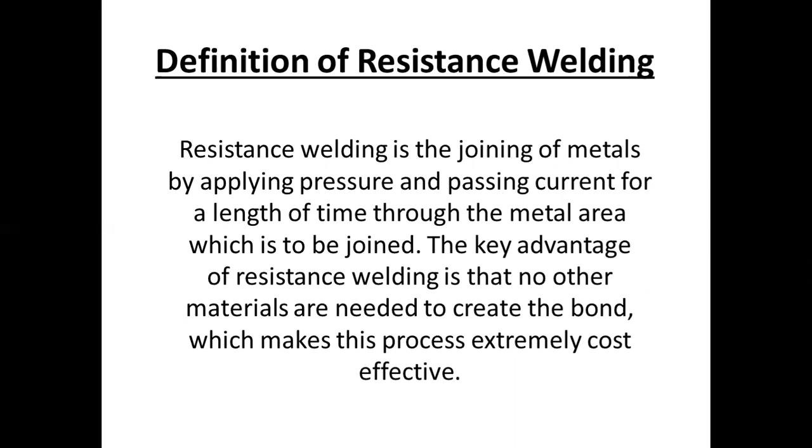We are doing this kind of welding through the metal area, passing current for a length of time through the metal area which is to be joined.

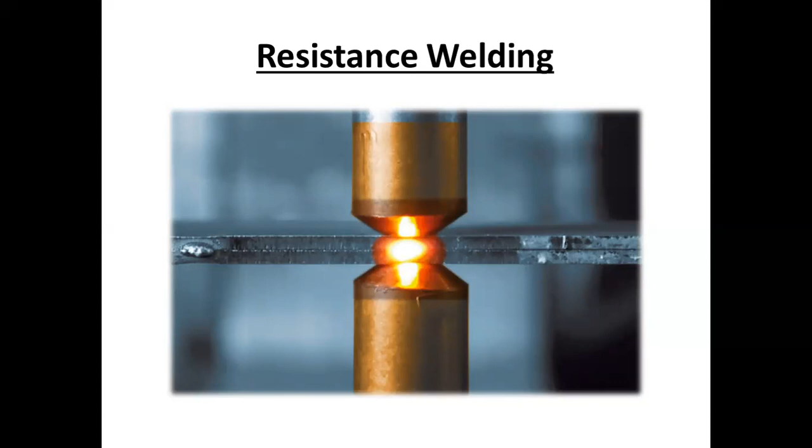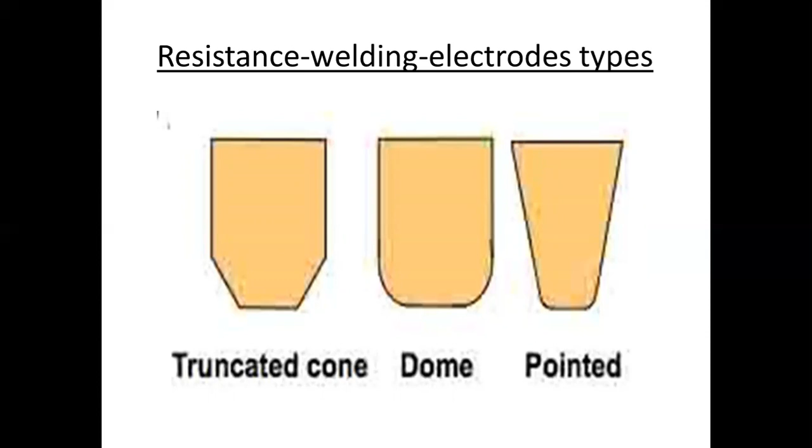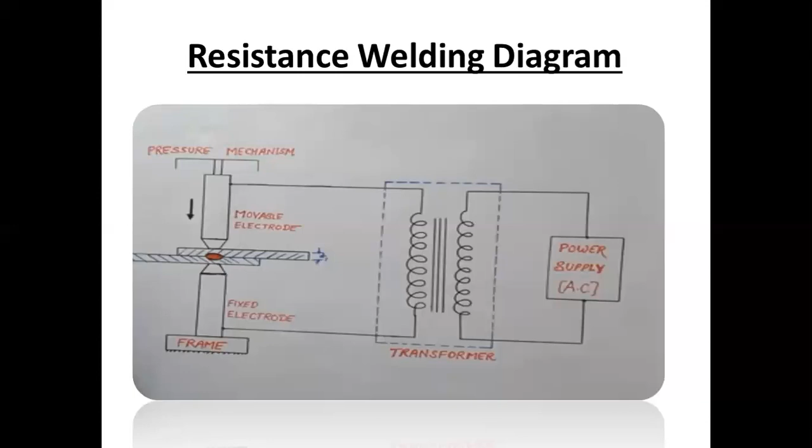There is 10,000 ampere current and 4 to 12 voltage. We are using this for the resistance welding.

Resistance welding working principle: the working principle of resistance welding is the generation of heat because of electric resistance. Resistance welding, such as seam, spot, and projection welding, works on the same principle. These are the types of resistance welding. We will discuss afterwards what is spot welding, what is seam welding. So whenever the current flows through electric resistance, heat will be generated.

Whenever the current flows through electric resistance, the heat will be generated, and the generated heat will depend on the material's resistance, applied current conditions on a surface, and the applied current time of period. This is how resistance welding works.

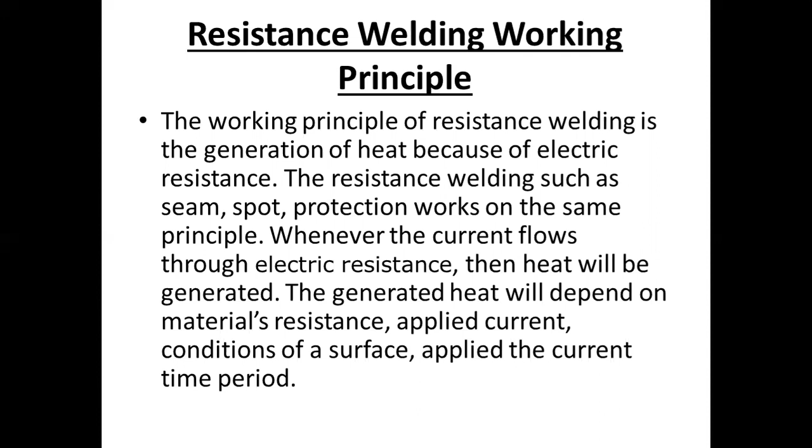Resistance welding formula for heat generation is H equals I squared R T. With this formula, the heat will generate, where H is the generated heat, and the unit of heat is joule. I is the electric current, unit is ampere. R is the electric resistance, unit is ohm, and T is the time of current flow, in seconds.

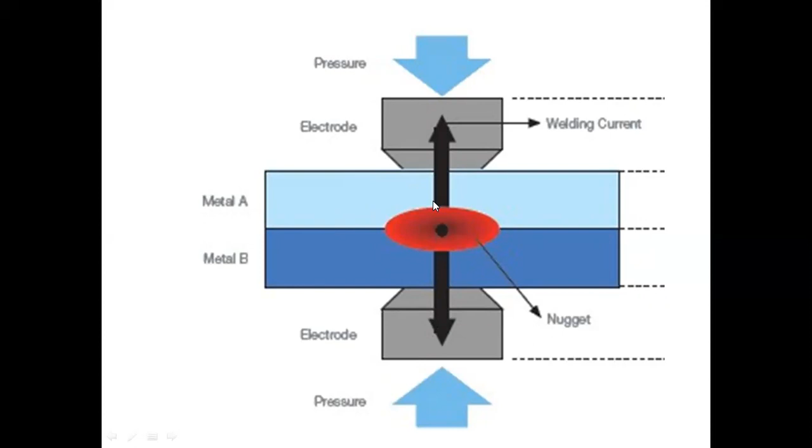As I said earlier, the pressure will be downwards, the electrode, the electric current is on metal A and metal B. Where the welding is done, this type of spot is called a nugget. So what is a nugget? In resistance welding, the welding of overlapping pieces of metal at small points by application of pressure and electric current creates a pool of molten metal that quickly cools and solidifies into a round joint known as a nugget. So you can see the spot, this is called a nugget. Understood?

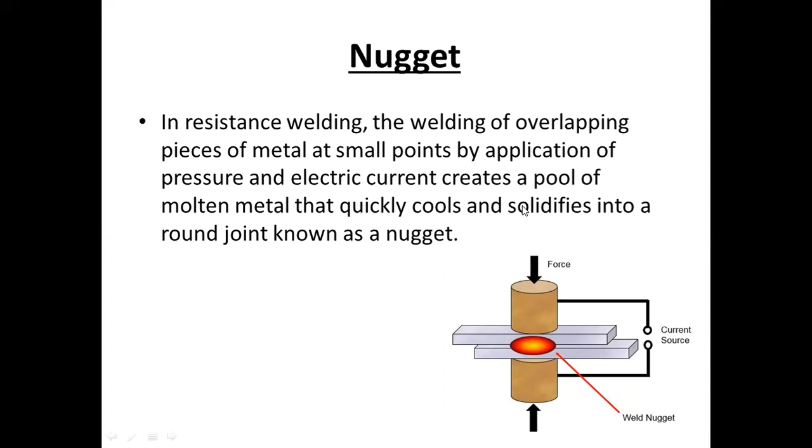Now, the types of resistance welding: spot welding, seam welding, butt welding, and projection welding.

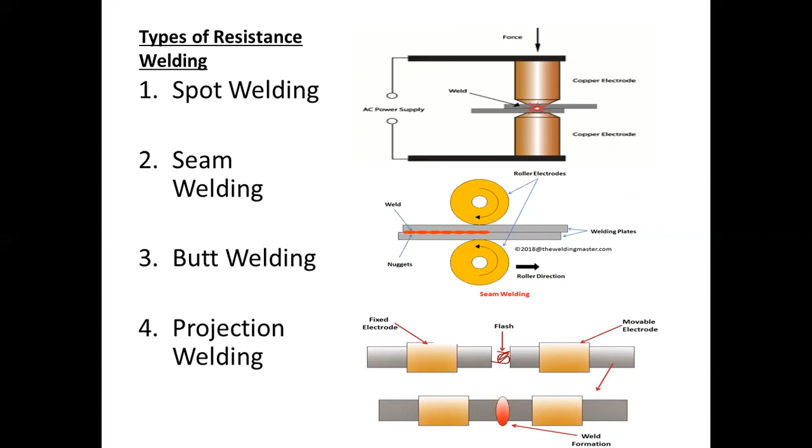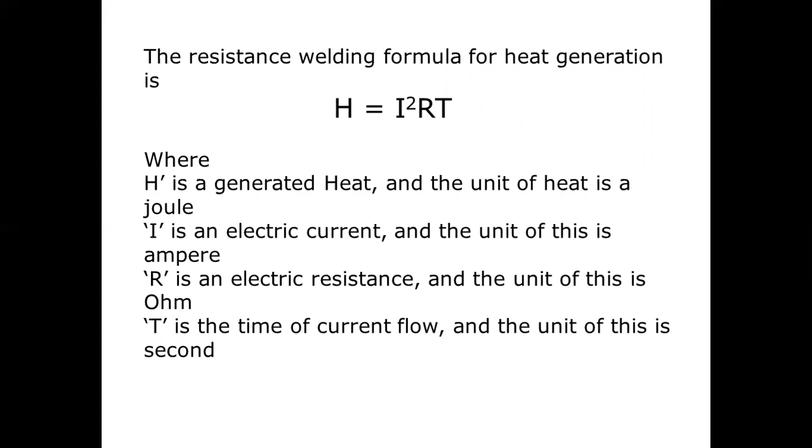Spot welding, or resistance spot welding, is a type of electric resistance welding used to weld various sheet metal products through a process in which contacting metal surface points are joined by heat. It is the main fundamental thing in resistance welding, and in spot welding also, metal surface points are joined by the heat. And how can I generate the heat? We can generate heat with this formula, H equals I squared R T, where we put the current, resistance, and time, so we can generate the heat.

So the metal surface points are joined by the heat. The AC power supply, force, downwards pressure, copper electrode, and we are using in the electrode copper with alloy. What kind of alloy? Tungsten, nickel, chromium. It will increase the hardness of the electrode.

Another type of welding is seam welding. Seam welding is the process of joining two similar or dissimilar materials at the seam by the use of electric current and pressure. As I said earlier, the fundamental principle of resistance welding is using electric current, pressure, and resistance to develop heat and form the nugget, completing the welding process. This process is mostly used on metals since they conduct electricity easily and can sustain relatively high pressures.

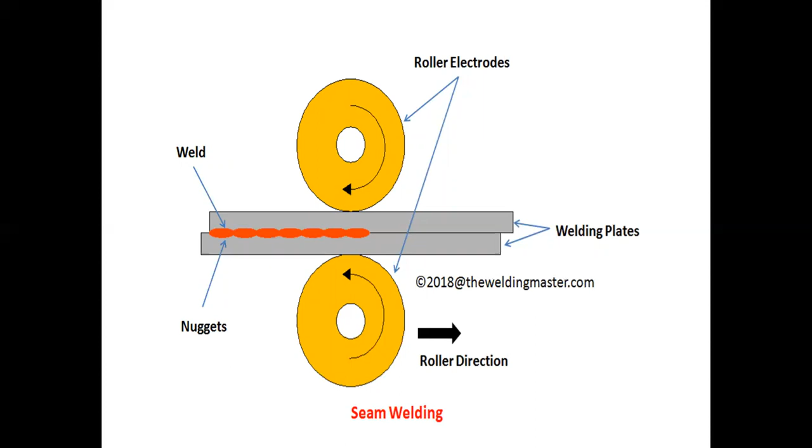This is another type of welding, butt welding. In butt welding, two pieces of metal of the same cross section are gripped together and pressed while heat is generated. There is a movable electrode and a fixed electrode. This kind of structure is used in butt welding or flash butt welding, whatever you call it.

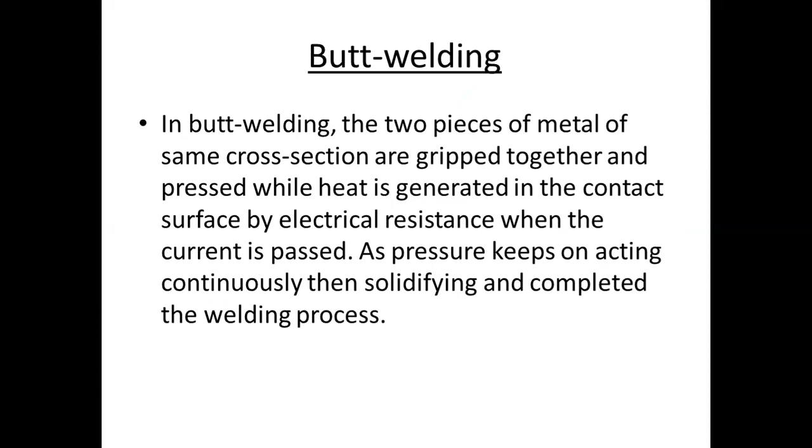Heat is generated at the contact surface by electrical resistance when current is passed, and as pressure keeps acting continuously, the joint solidifies, completing the welding process. Pressure is applied, some flash is conducted, and then we pass the electric current. The flash occurs and the welding is completed by pressure and electric current.

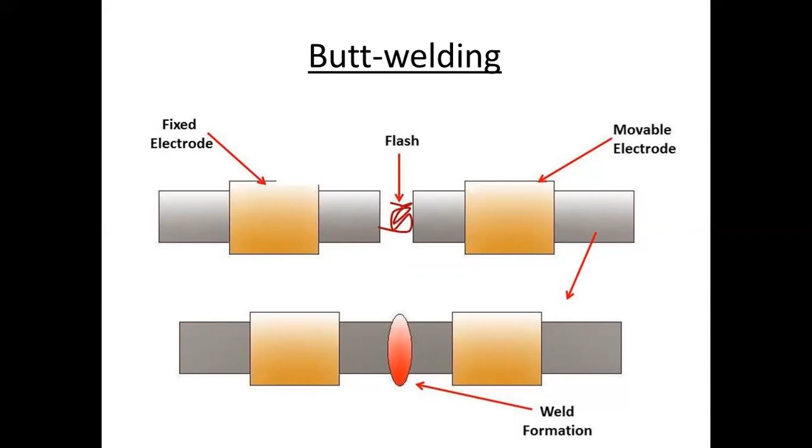What is internal resistance? We all know about that. Internal resistance occurs when sheet 1's atomic force applies on sheet 2, and sheet 2's atomic force applies on sheet 1, generating stress at that moment. This is internal resistance. So the welding is done because of this internal resistance with the help of electricity, internal heat is also generated, and we can produce any number of spots at a time.

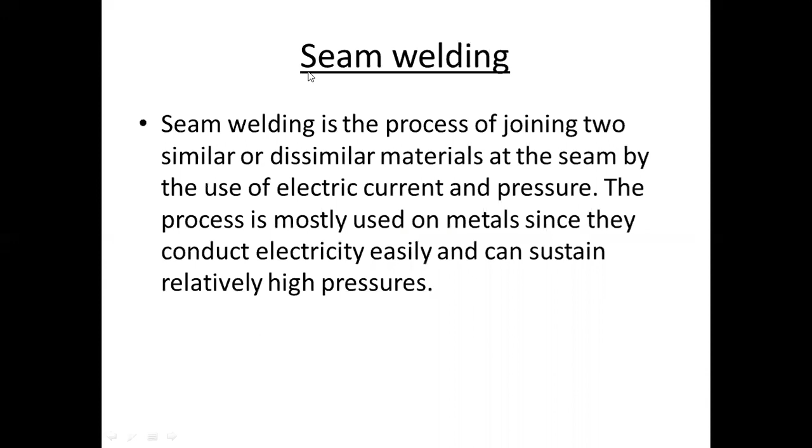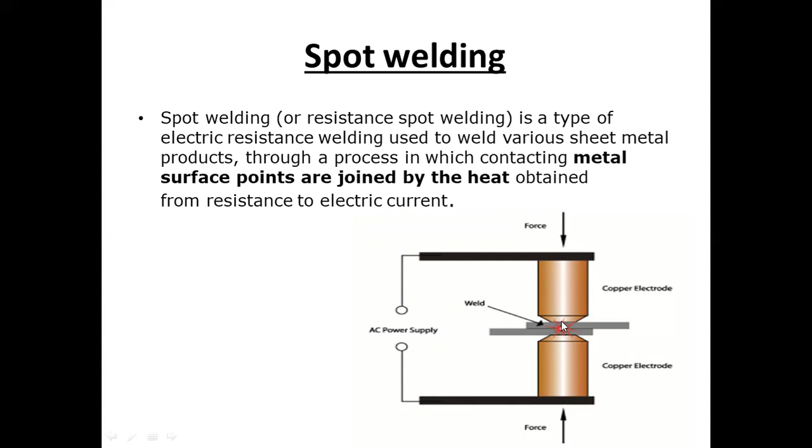Look here. When we give force downwards, on sheet 1 some pressure will occur on the upper portion of sheet 1. At that moment there will be a dent formed - this is called indentation. So in projection welding, there is no chance of indentation happening. We use this in wire mesh, automobile industry, and refrigerators.

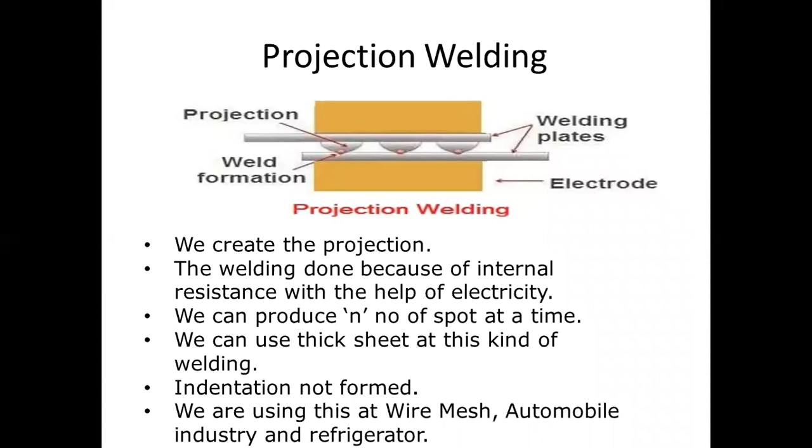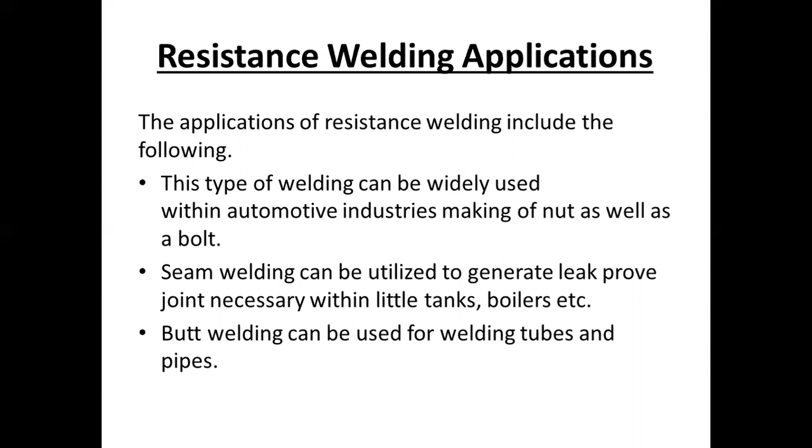What will be the advantage? In this method, it does not necessarily require highly expert labor. The resistance welding metal thickness ranges from 20 mm to as thin as 0.1 mm. It can be automated, so the rate of production is high. Both related and different metals can be welded. Welding speed is high, and it does not need any flux, filler metal, or protecting gases.

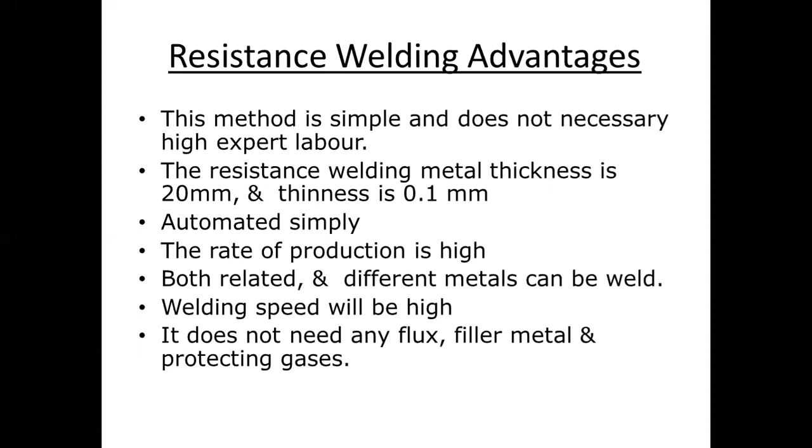We don't need any flux, filler metal, or protecting gases for resistance welding, so the cost will differ a lot compared to gas welding and arc welding. Now the disadvantages: tool cost will be high. The work section thickness is limited because of the current requirement, since we need a large quantity of current. It is less proficient for highly conductive equipment, and it consumes high electric power, making electricity costs very high.